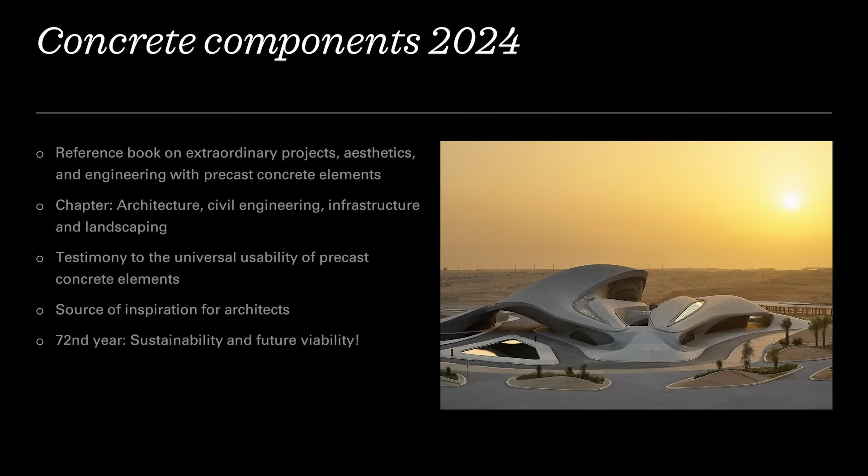Betonbauteile is a reference book about extraordinary projects, aesthetics, and technology with precast concrete elements. It consists of 4 chapters: architecture, construction, infrastructure, and landscaping. It is a testimony to the universal applicability of precast concrete elements and a source of inspiration for architects.

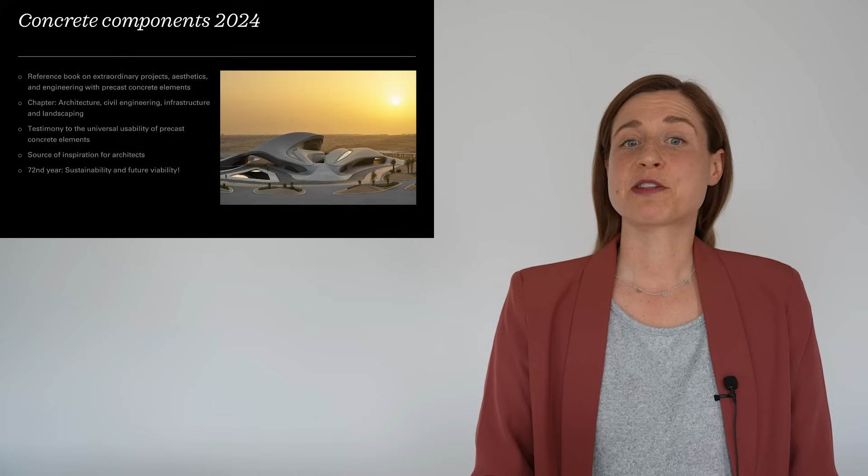The latest yearbook is already in its 72nd year and was published with the subline Sustainability and Future Viability. I am delighted to be able to present 4 very special projects with prefabricated concrete components from the yearbook to you today.

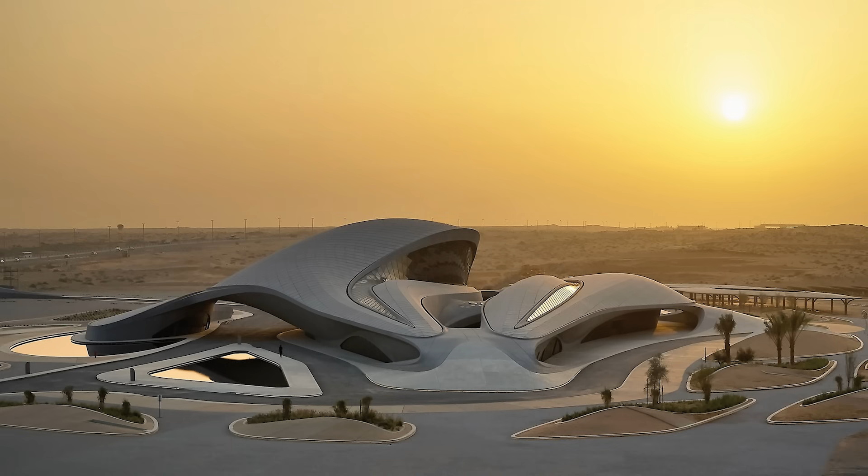First of all, I would like to introduce you to the Bee'ah headquarters in the middle of the desert of the United Arab Emirates. You can see it here in this picture. Impressive, isn't it? The headquarters of the environmental and recycling company Bee'ah, which was founded in 2007, measures 9,000 square meters. The architecture was designed by Zaha Hadid Architects, and this was also the last project that Zaha Hadid herself was involved in before she passed away.

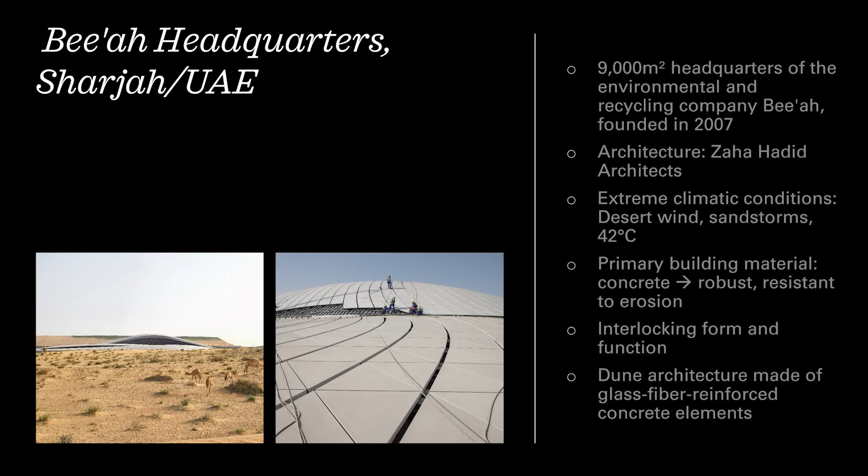The particular challenge of the project was the extreme climatic conditions. For example, desert wind, sandstorms, 42 degrees. And that brings us to the main reason why precast concrete elements were used in the construction. The primary building material is concrete because it is robust and erosion resistant. The whole building can be understood as an interlocking of form and function. The form represents a dune that blends into its surroundings. It consists of glass fiber reinforced concrete elements.

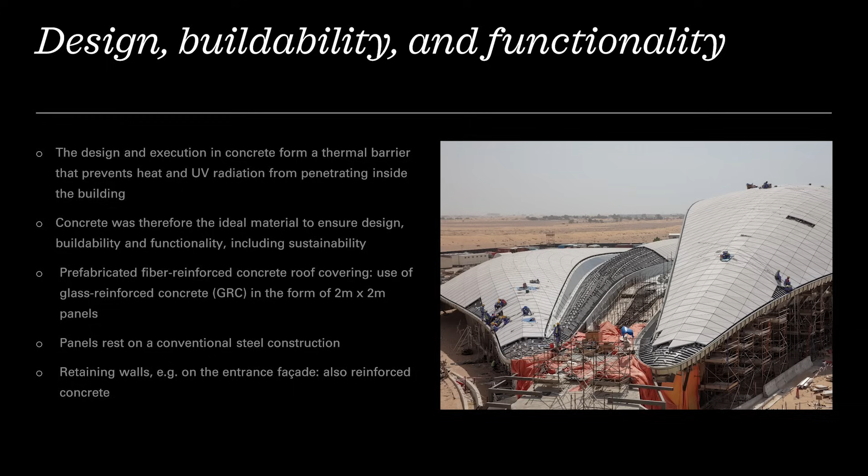And this is how Panos Papanastasis, the project manager of the Buro Happold office in London, which was responsible for the structural analysis of the project, described it. If you look at the building from above, the outer concrete facade is a kind of protective shield against the elements, for example, sun and wind, and so on. And I think he is right. The design and execution in concrete form a thermal barrier that prevents heat and UV radiation from penetrating inside the building. Concrete was therefore the ideal material to ensure design, buildability, and functionality, including sustainability.

The prefabricated fiber-reinforced concrete roof coverings are made of glass-reinforced concrete in the form of 2 meters by 2 meters panels. And the panels rest on a conventional steel construction. Retaining walls on the entrance facade are also made of reinforced concrete. The headquarters is a 2-story building. And one of its highlights and the tallest element is a 15-meter-high entrance hall, which represents the first of 2 dunes.

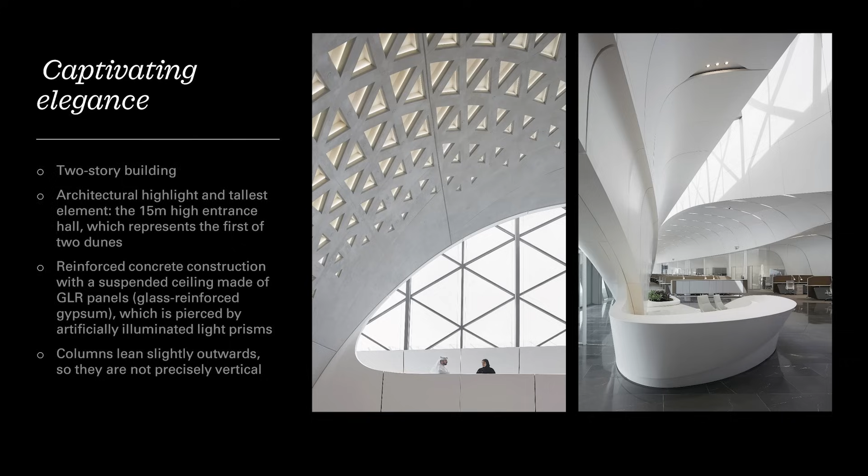Here you can also see the reinforced concrete construction with a suspended ceiling made of glass-reinforced gypsum. It is pierced by artificially illuminated light prisms. The columns lean slightly outwards, so they are not exactly vertical. And here is the construction board for the project, to read for you.

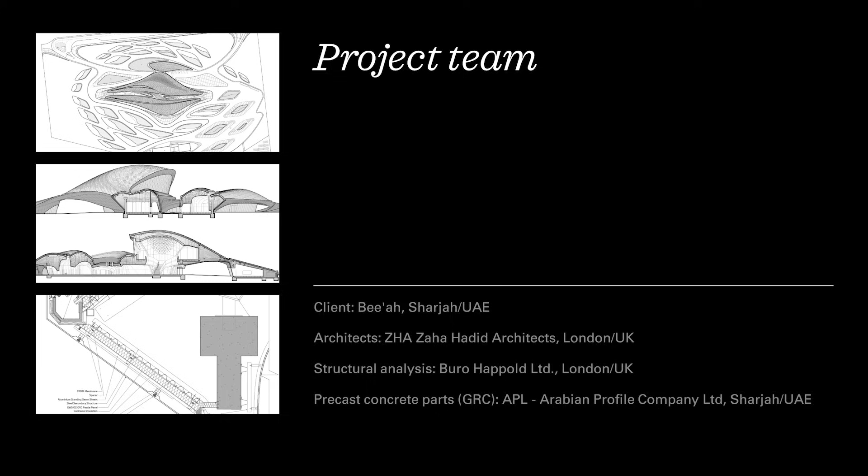The brief for the external appearance was just as demanding as the structural implementation of the innovative learning concept within the building structure. The brief was to represent both the hard shell, soft core concept and the connection to the existing monastery in terms of materiality and color concept. For this reason, many different facade materials were researched, compared, and tested. And the winner is, in the end, concrete was the material of choice. The main reason was that concrete is a material that best reflects the messages: the interplay between old and new, the clear lines, the self-confidence of the girls, and strength.

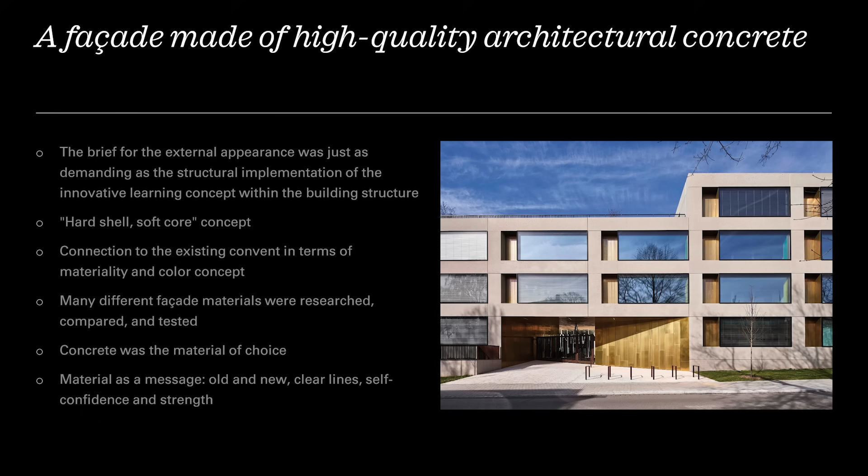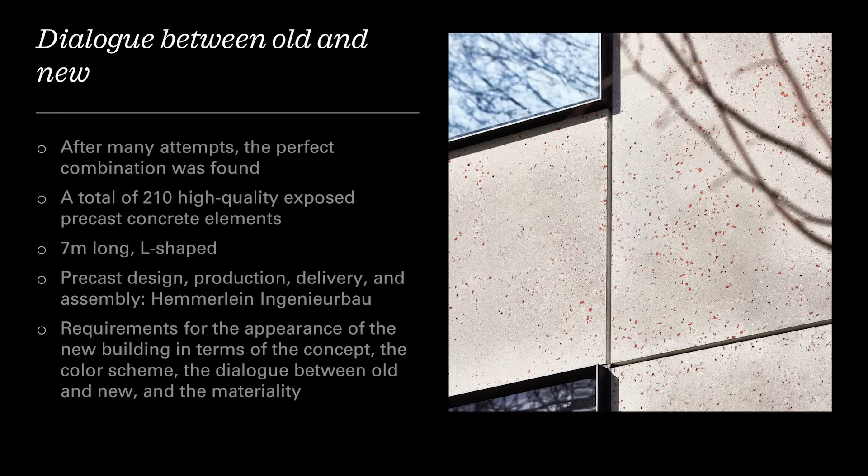However, it was not only the choice of material that took a lot of thought, but also the concrete mix. After many tests, the perfect combination was found, and a total of 210 high-quality exposed precast concrete elements were produced. Hemmerlein Ingenieurbau was responsible for it. A special feature of the production, which took around 4 months, was the use of recycled material.

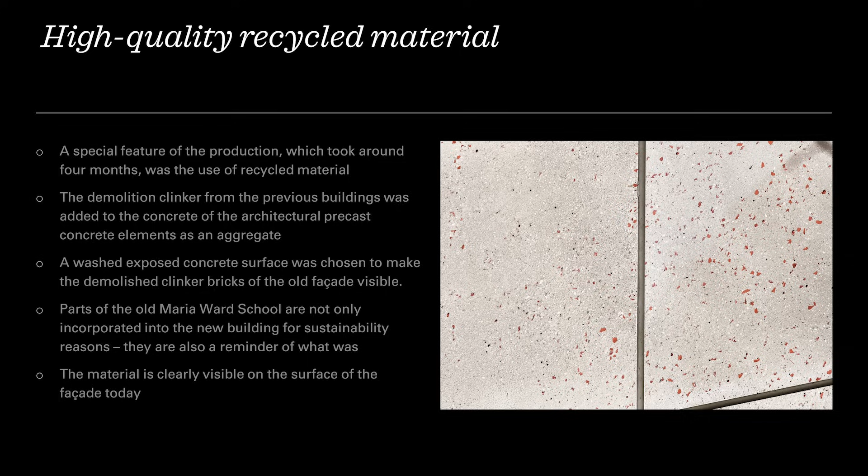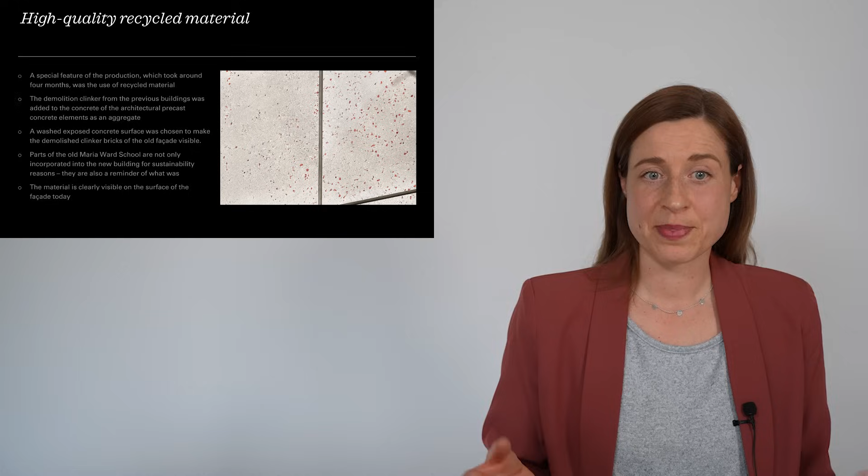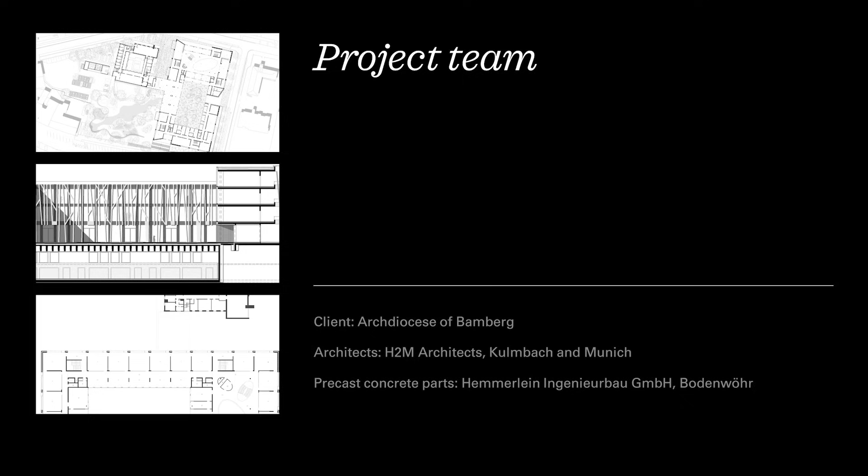The demolition clinker from the previous buildings was added to the concrete of the architectural precast concrete elements as an aggregate. A washed exposed concrete surface was chosen to make the demolished clinker bricks of the old facade visible. Parts of the old Maria Ward school are not only incorporated into the new building for sustainability, they are also a reminder of what was, of the history of the school. The material is clearly visible on the surface of the facade today. And for you, dear listeners, the construction board for this project too.

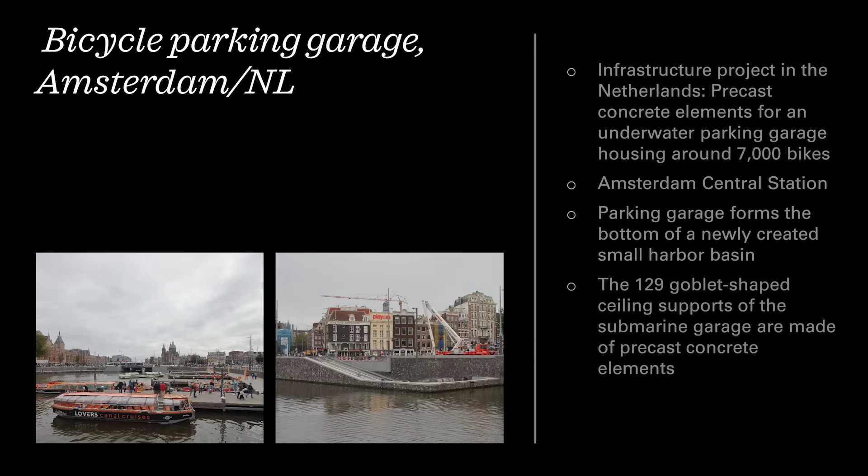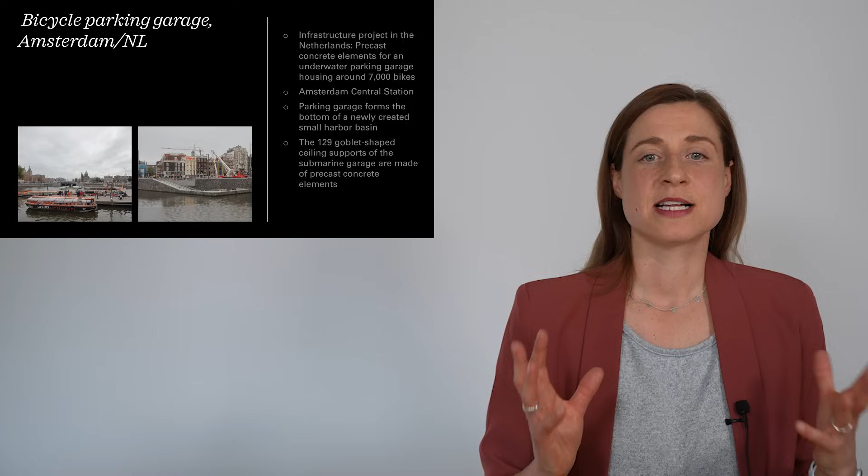Our next project takes us to the Netherlands, to Amsterdam to be precise. It's a bicycle parking garage. The third project that I would like to present to you is the infrastructure project. Precast concrete elements were used here for an underwater parking garage for around 7,000 bicycles. The parking garage was built at Amsterdam Central Station and formed the base of a newly created small harbor basin.

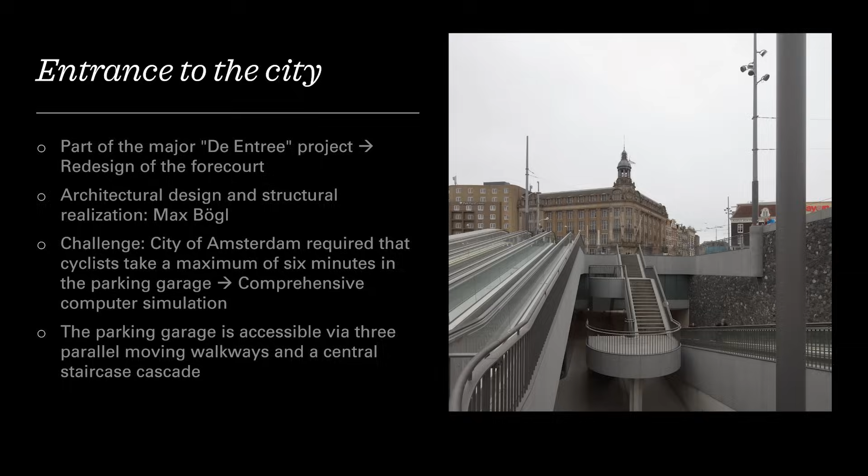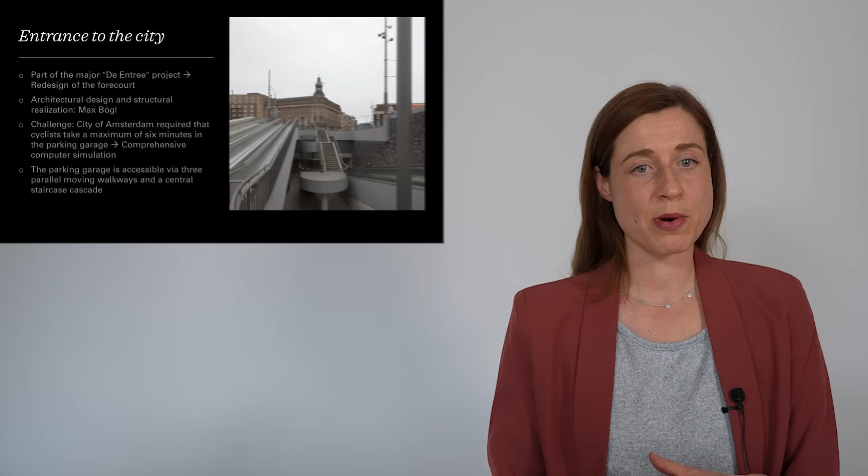The ceiling supports of the submarine garage are made of precast concrete elements. The project is part of the major project De Entree. The architectural design and realization come from Max Bögl. A specific challenge was the requirement from the city of Amsterdam. The city requires that cyclists take a maximum of 6 minutes in the parking garage. This was ensured with comprehensive computer simulations. The parking garage is accessed via 3 parallel moving walkways and a central cascade of stairs.

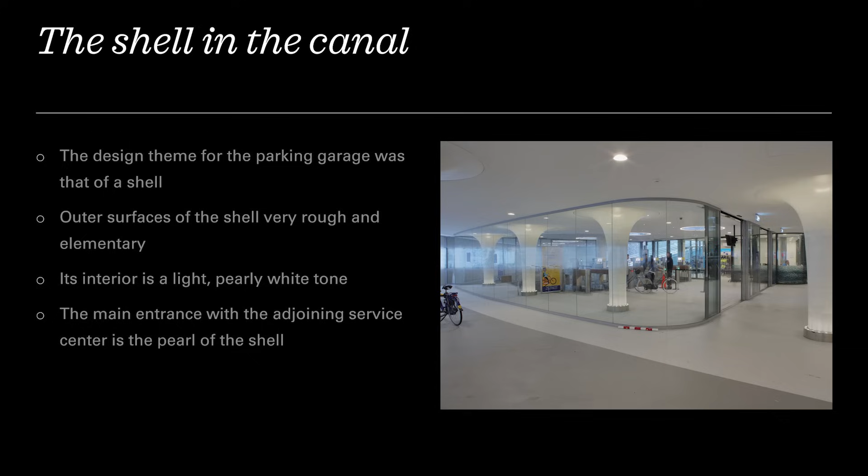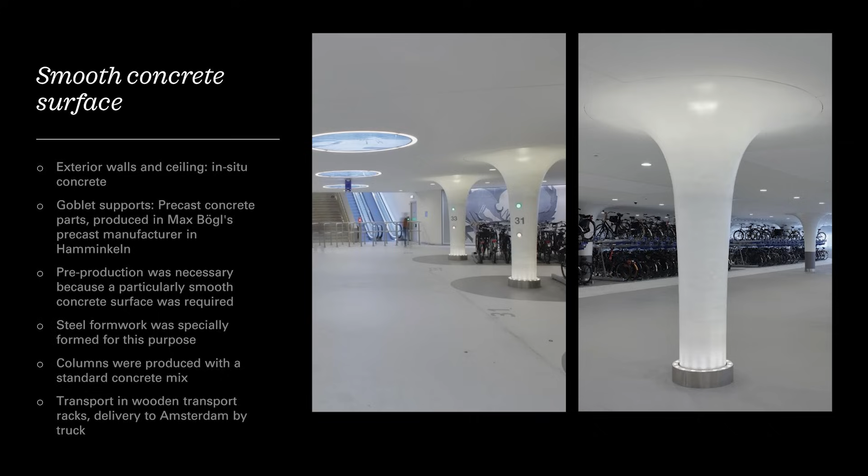The design theme for the parking garage was that of a shell. I think you can see it here. The outer surface of the shell is very rough and elementary. In the interior is a light pearly white tone. The main entrance with the service center is the pearl of the shell. While the outer walls and the ceiling are made of in situ concrete, the 129 goblet-shaped ceiling supports of the submarine garage were prefabricated. And why?

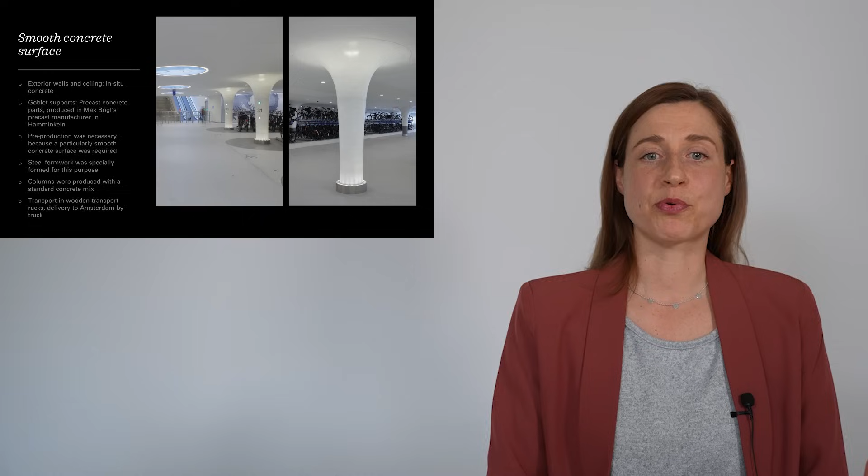They were manufactured in Max Bögl's precast plant in Hamminkeln because a particularly smooth concrete surface was required. Steel formwork was specially formed for this purpose. Columns were produced using a standard concrete mix. The precast elements were carried out in wooden transport racks by truck. A pearlescent coating was applied to the surface of the goblet supports. Beautiful, right?

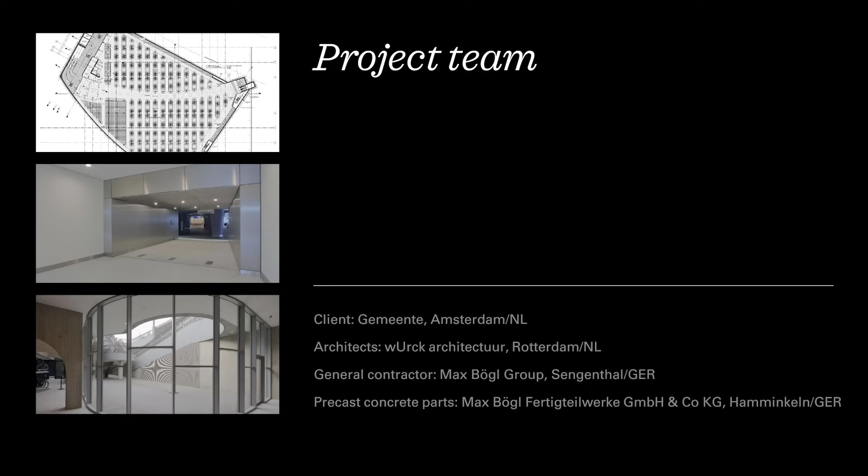And here you can see one of my personal favorite projects from the yearbook. This is a new building for the Greifswald City Archive. The archive contains important written records on the history of the city. The previous archive in Arndtstraße had become too small, so an open planning competition was held, which was won by Code Unique architects. The city archive can be interpreted as a kind of knowledge repository. The clear facade design is a reflection of the content.

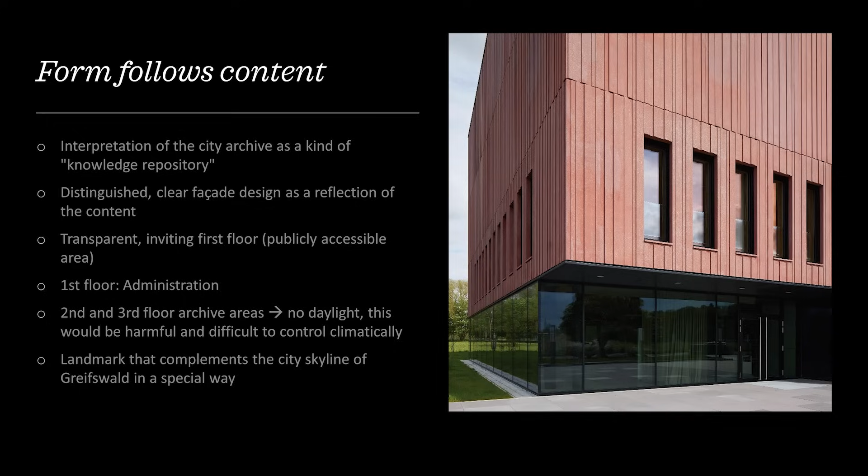The building has 3 floors. In the first floor is the administration. This area is open to the public. It is designed to be transparent and very inviting. You can see the eye-catching glass front. The second and third floor archive areas aren't open to the public. They have no daylight because this would be harmful and difficult to control climatically. The building is a landmark that complements the city skyline of Greifswald in a very special way.

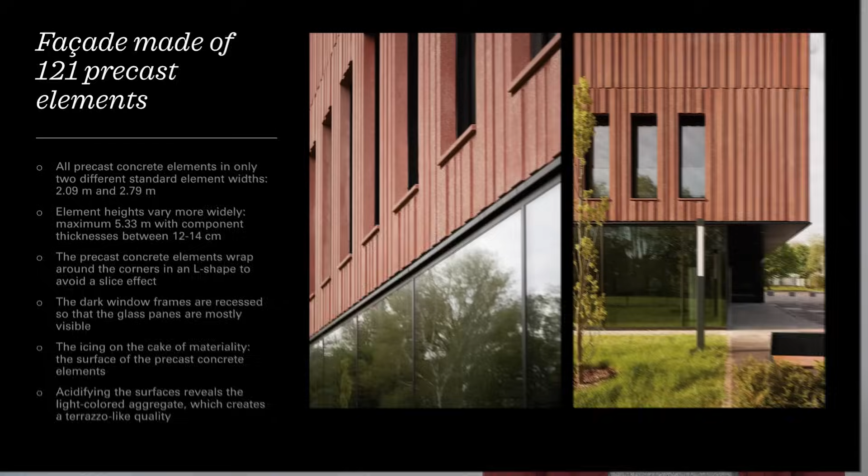But now to the precast concrete elements on it. The facade is made of 121 precast elements in only 2 different standard element widths. The element heights vary more widely. The precast concrete elements wrap around the corners in an L shape to avoid a slice effect. The dark window frames are recessed so that the glass panes are mostly visible. The icing on the cake of materiality: the surface of the precast concrete elements. Acidifying the surfaces reveals the light-colored aggregate, which creates a terrazzo-like quality.

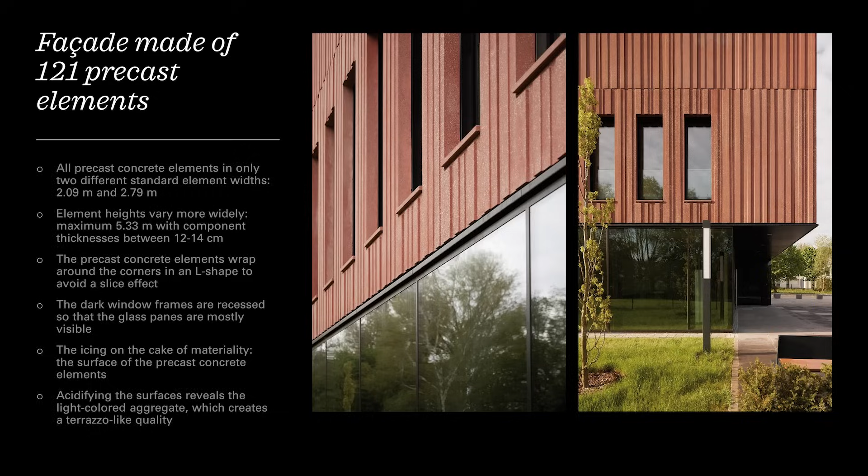The building is particularly impressive in terms of its sustainability. What is special here is the passive air conditioning. Technical air conditioning is largely dispensed with. Instead, component activation and adjustable ventilation openings enable natural regulation.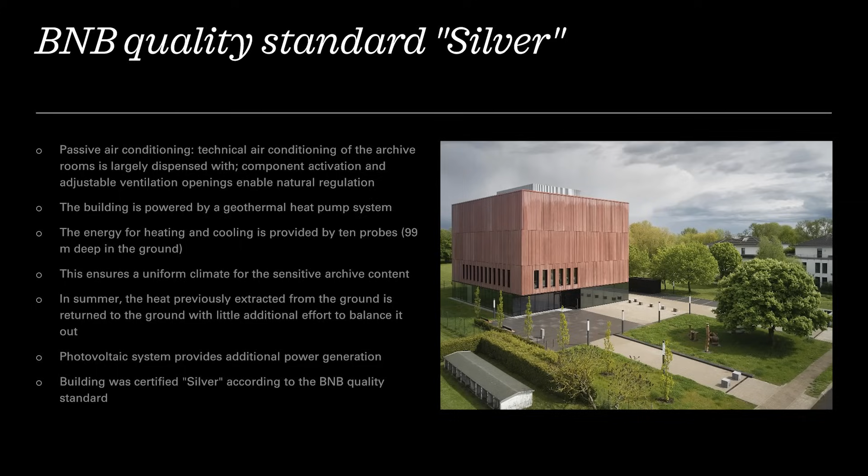The building is powered by a geothermal heat pump system. The energy for heating and cooling is provided by 10 probes, which are 99 meters deep in the ground. This ensures a uniform climate for the sensitive archive content. In summer, the heat is returned to the ground. A photovoltaic system provides additional power generation. For all these reasons, the building was certified silver according to the BNB quality standard. And the project team.

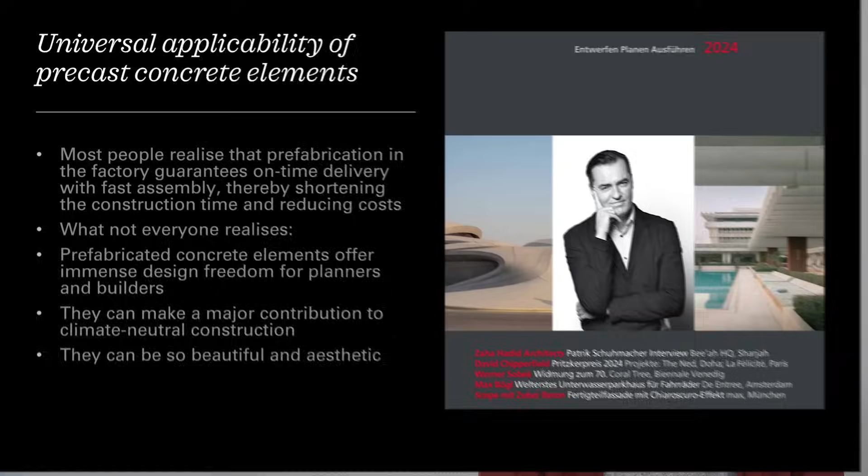So, let's summarize. Most people realize that prefabrication in the factory guarantees on-time delivery with fast assembly, thereby shortening the construction time and reducing costs. What not everyone realizes: prefabricated concrete elements offer immense design freedom for planners and for builders, of course. And they can make a major contribution to climate-neutral construction. And they can be so beautiful and so aesthetic.